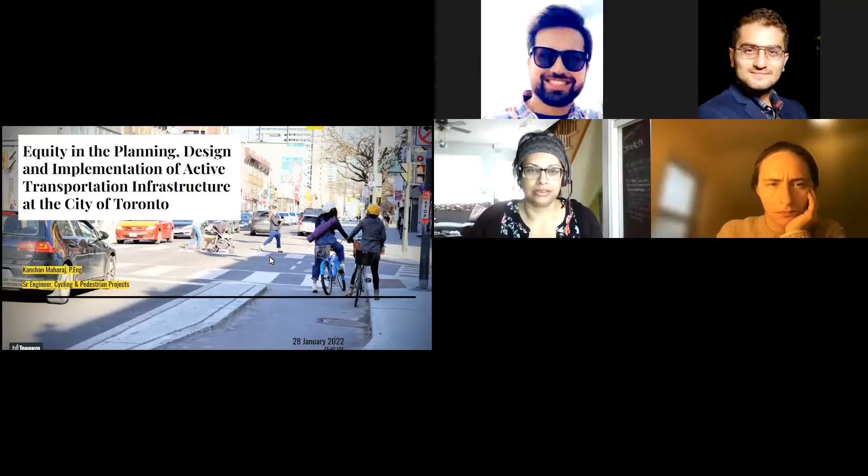Overview of the topics and the sequence. I'm going to try and summarize all of this data and all of the information. I'm going to go over our history of the cycling network plan, the first plan in 2016, and the recent update in 2021, the near-term prioritization framework that we are now using, and the cycling impact analysis and neighbourhood improvement areas that we use to help incorporate more equity data and information to inform our cycling network plan.

Improvements to the equity index map, the public consultation design process that we go through. I'm going to present a case study of a neighbourhood improvement area where we implemented a project and had to go back and make changes. And then talk briefly at the end about some of the materials and construction processes that we use.

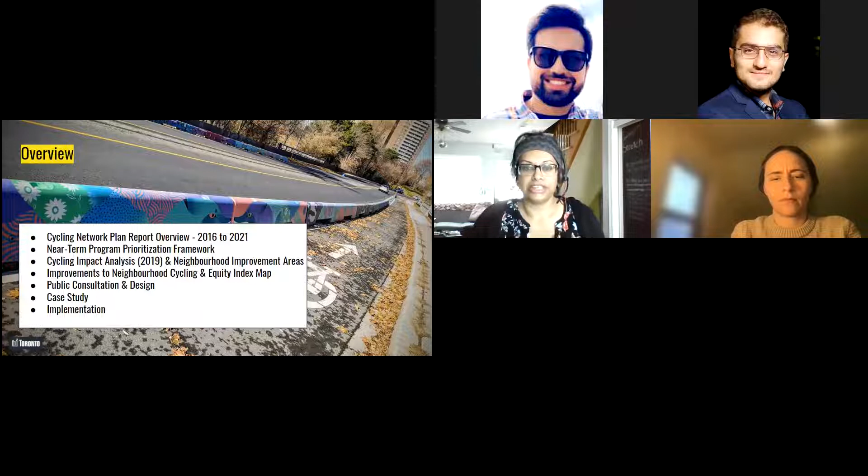So our first cycling network plan was in 2016. And it was a 10-year cycling network plan with 8 categories of analysis. Let's move this out of the way. In the orange here are all of the categories that we used in the first cycling network plan: current typical trip generation type of data, connectivity, barrier crossings, network coverage, transit access, safety, and potential cycling and current and future cycling network demand.

This network plan was based on a snapshot of a tool that the city uses called T.O.INview, which is part of our capital coordination office. And this tool is used to coordinate all of the different types of construction all around the city. At the time, most divisions participated in it. Now I think all but one major division participates in it, as well as third parties. So TTC, all the utilities also have all of their projects in there.

But at the time in 2016, when we did this first snapshot, because of how rapidly everybody's programs were changing and that there wasn't high participation, by the time we published the map and the network plan, it was already out of date because everybody's programs were changing.

In 2018, we came back and we redid it. And we realized that we need a near-term program and a longer-term program. A near-term to take advantage of the projects and opportunities that were more solid and more firmly planned and already programmed, as well as a longer-term plan and a citywide plan. And we didn't lock it into 10 years anymore. We just looked as far in the future as we had data.

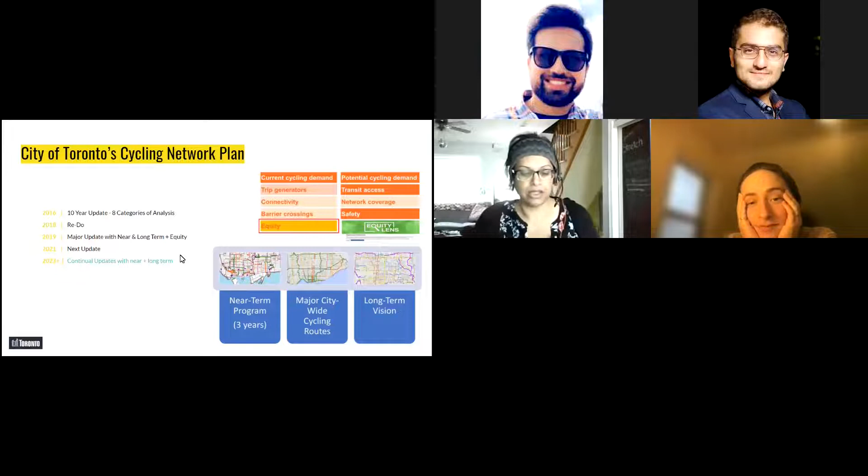The goal of the cycling network plan has always been to connect, grow, and renew our cycling infrastructure. Historically, we had always taken advantage of road reconstructions or resurfacings and bundled with those types of projects. We didn't really deliver projects on our own. And what that resulted in is a lot of disconnected and small segments of cycling infrastructure wherever the opportunity historically presented itself.

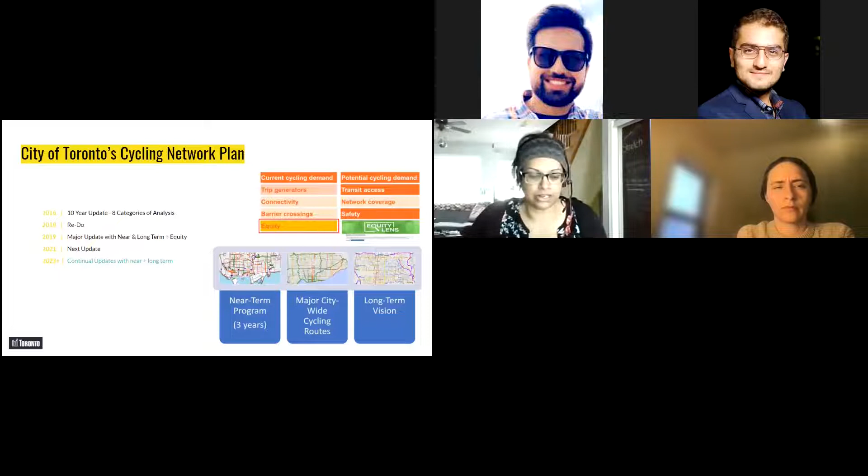So our goal now is to try and connect all of those disjointed sections, as well as to grow what we have out there and renew and upgrade the older pieces of infrastructure to bring it up to current standards. Another goal of our cycling network plan is to try and meet the city policy objective in the city's official plan to bring all Toronto residents within 1 kilometre of a designated cycling route, as well as the TransformTO long-term goal that 75% of trips under 5 kilometres are walked or cycled by 2050.

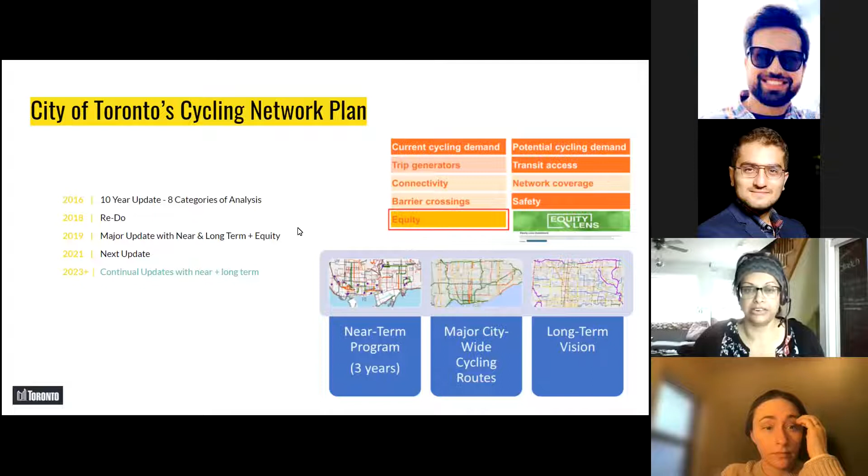So the 2019 plan, the dark orange factors here are ones that we added more data in 2019 to do a further analysis, as well as we added the equity data and criteria. This slide shows our near-term plan.

Something else that happened between 2016 and 2019 is that the Transportation Division went through a reorg. And the cycling group had their planning responsibilities removed from our group and moved to the capital programming group. So one of the advantages of that is that cycling is no longer planned independently of transportation infrastructure. It's included by default as part of the larger program.

And our group, the group that I'm in now, the Cycling Pedestrian Projects Unit, we are responsible for delivering the near-term plan after the capital programs unit plans the longer-term plan and determines what is possible near-term and what is possible in the long-term. And then they hand the near-term plan to us to do the consultation and the delivery of that near-term program. This slide just shows how that near-term program is determined.

So the candidate routes are all compiled, and I'll talk about this a little later about how that data is compiled and what data goes into it. And we look at opportunities. So state of good repair program, road safety focus, planning area focuses. We look at the trip generators and all that type of data, the collision data, barrier crossings, network coverage data.

And then how constructible and complex is this project? How likely are we to be able to do it in the near term, and what opportunities do we have to build it? So whether it's a standalone project bundled with a road reconstruction and resurfacing, or whether it can be done quick build with our own materials and our own contracts, or it needs civil construction.

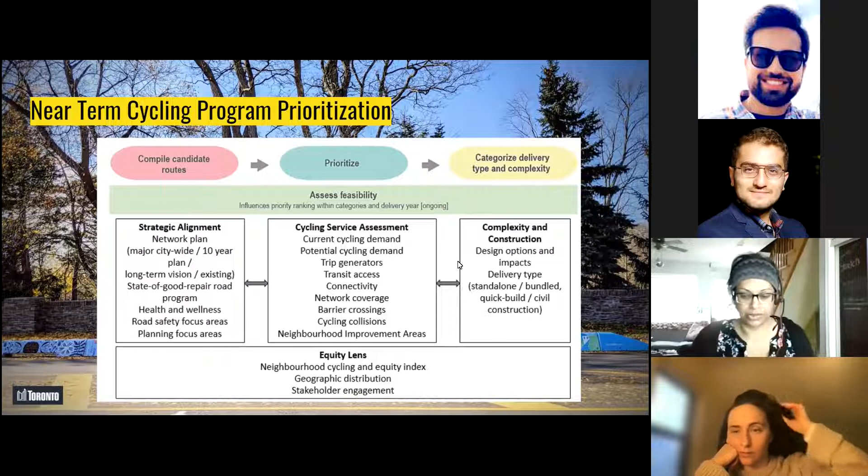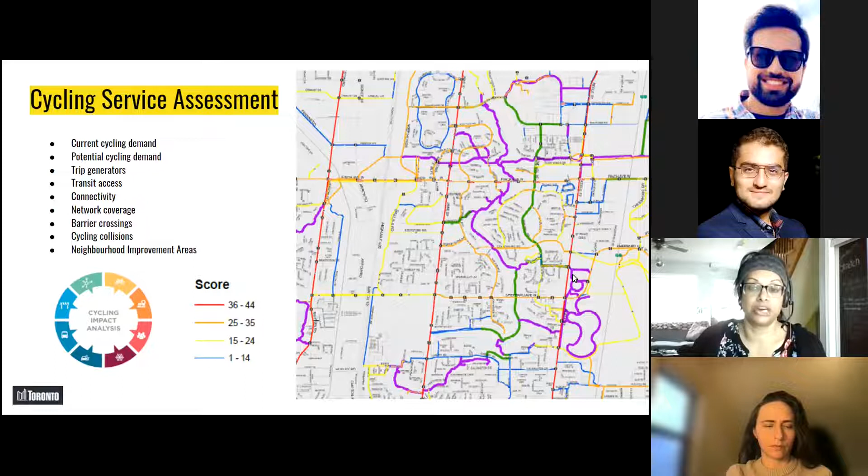So the city has designated neighborhood improvement areas. In March 2014, the City of Toronto identified 31 neighborhoods out of the 140 social planning neighborhoods that are designated as neighborhood improvement areas under the Toronto Strong Neighborhood Strategy. There are 15 planning tables that cover these 31 neighborhoods, and each NIA is assigned a community development officer who will work collaboratively with residents and city staff to make sure city services and facilities address the neighborhood priorities. It also supports partnerships with other community agencies to deliver services.

Each route that we analyze as part of our cycling network plan has an equity score, and that equity score is based on 5 key areas: the economic opportunities in the neighborhoods, income levels and quality of the job opportunities; the social development, things like education, literacy, access to social recreation and cultural services; participation in decision-making, so voting in elections and working with neighborhoods to make plans and priorities;

healthy lives, like medical care and disabilities and illnesses that the residents in that neighborhood live with; and the physical surroundings in the neighborhood. So access to transportation, parks, green spaces, public meeting spaces, and air quality.

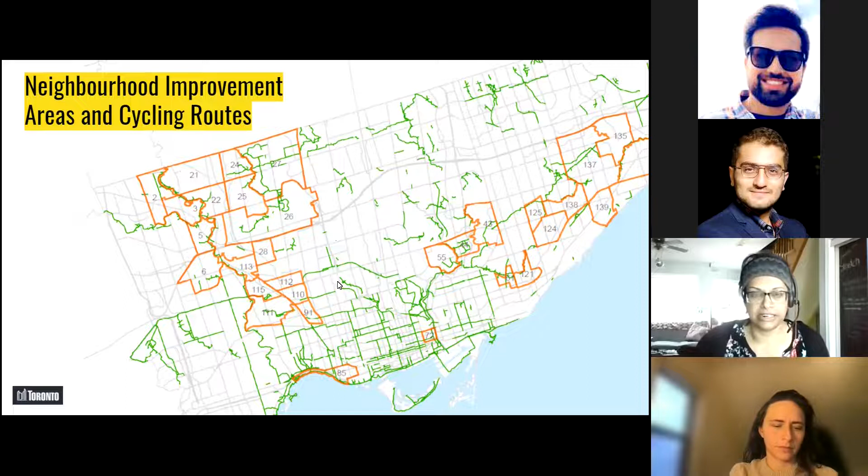When we did our 2019 update, we went to almost all of these neighborhood planning tables, of the 15 of them. And we took maps of their neighborhoods and we put them up on the walls and we asked for feedback on anything related to how people get around their neighborhood and where the important destinations are. And not just cycling. So that's a key thing to remember in this consultation that we did.

We asked for everything. How people get around. Is it walking, transit, driving? Where do they go and how do they get there? And what barriers do people experience?

Safety, lighting, accessibility, costs. Where do people want to go and where do they need to go, regardless of the mode? And all this data we collected, we still have all of this data, we still use all of this data, and it helps inform our public engagement and consultation process when projects are programmed and make it into the near-term plan for these different neighborhoods.

We used all of this data to then create a heat map to show where the important destinations were and to inform the scoring process. When we scored all of our routes, if a route passes through or serves a neighborhood improvement area, it automatically got double the points. So if a route either passes through or serves an important destination that people in a neighborhood improvement area said is important to them, we doubled the points.

And the reason for that is to hopefully try to float those routes up to the top of our scoring and prioritize them in the delivery process as well. Then we took all of this heat map data and overlaid it with our cycling network plan data, as well as the neighborhood improvement area data, just to validate and to make sure that we were actually serving these neighborhoods more effectively.

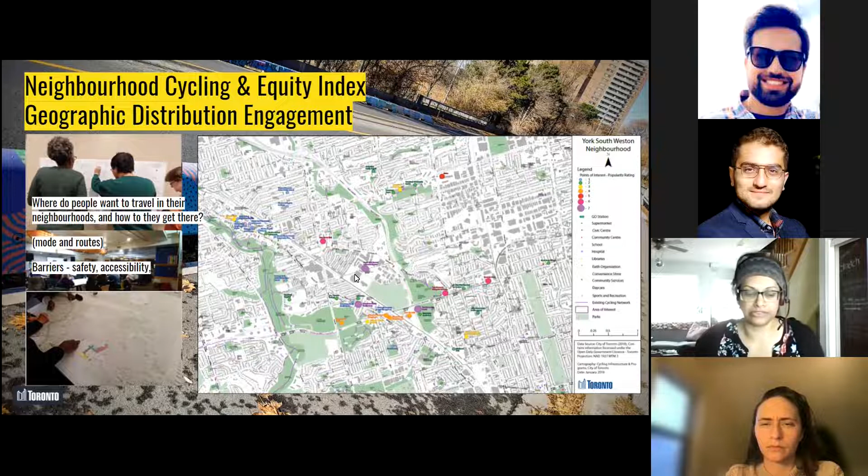And that's part of our public consultation process that we do during the year up to before the project is actually built. And most of the tools that we've been using, like the equity index and that type of data analysis, aren't specific to transportation. So there's a lot of room for improvement here, which is what our division has started to embark on most recently. And I'll talk about our budget a little bit later, on how we're applying an equity lens to our budget as well.

And transportation's overall goal is to try and prioritize designing and building integrated cycling infrastructure in neighborhoods with vulnerable populations. So people with low income, women, youth, racialized groups throughout the city of Toronto. And I'll also talk about that later when I talk about our cycling budget.

So the next slide shows our 2022 to 2024 near-term program. The different color codes show the routes that are underway, that are new, renew routes that are already out there that we're going to upgrade, and the ones that we're studying for future implementation. There's a few routes on here that were previously approved for implementation that will be programmed as soon as opportunities allow. You might hear me say state of good repair; that's also part of the renew program, to upgrade things that are out there to bring them up to current standards.

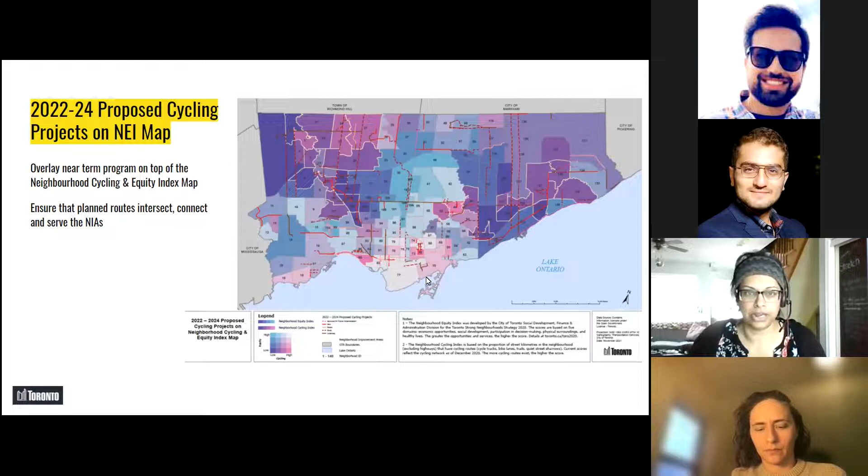As I mentioned previously, our unit in 2019 was reorganized such that the planning of cycling infrastructure is now part of this programming. It's no longer our responsibility at all to program long-term cycling. It's now part of the overall transportation programming and prioritization framework.

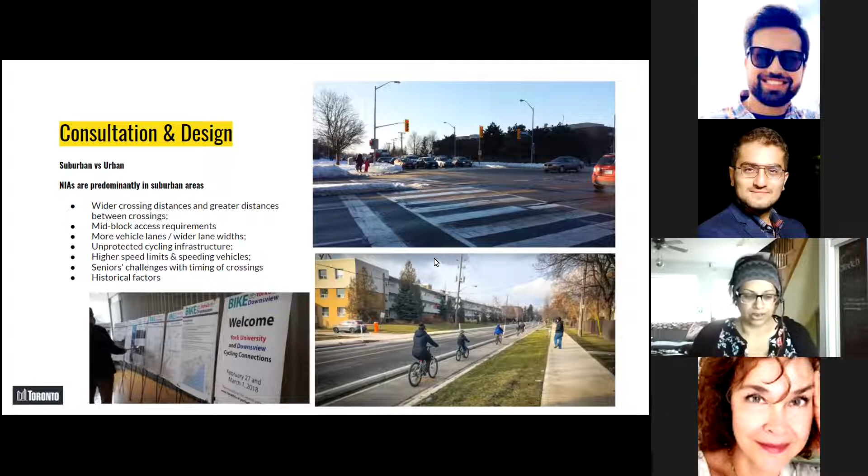This is a case study about a project that we worked on in one of the neighborhood improvement areas, Flemingdon Thorncliffe, which is in the northeast corner of Toronto in the curve of the Don Valley Parkway. We built the first project there in 2018, and we went back in 2021 to make changes. We did our consultation and outreach in 2017 to 2018, at the same time that we were doing the new 2019 cycling network plan. Then we had to go back in 2021 to make changes based on the feedback that we received.

So this is what we did for this project. It's a high density neighborhood improvement area, a lot of high-rise buildings, immigrant populations, variety of languages, ages, and abilities. It's also a TTC route with high transit use, and lots of potential cycling connections outside and within this area. We had many consultations. We did pop-ups. We partnered with neighborhood groups. I think we hired TCAT as well to do outreach in this neighborhood. And we created a lot of data.

We asked questions related to cycling safety, pedestrian safety, parking. We also do parking surveys before we make any impacts to parking, and we saw that there were a lot of off-street parking lots that were not used. So it seemed at the time that we could remove a lot of parking because there was very much underuse of off-street parking lots. They were vastly empty.

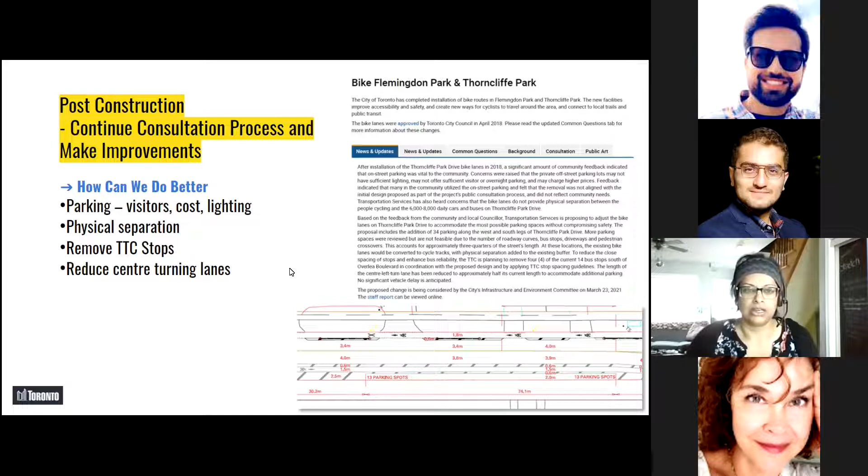The next couple slides are about our delivery process. So I'm just going to skim over this now. People can ask me more questions about this later. But something I touched on earlier was the ways that we deliver projects and how complex or not complex things can be. Usually, historically, our best opportunity to make significant impact to a street is as part of a road reconstruction, because that's when we can move curbs. We can change the physical amount of space that we have to work with when the full road is being reconstructed. That doesn't happen very often. It's at least every 20 years, often longer. There's many roads in the city that haven't been reconstructed for more than 50 years.

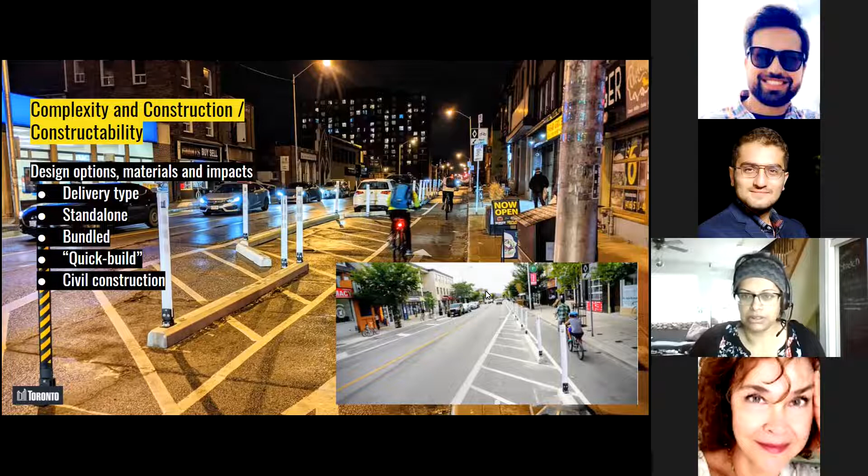And then these bollards are also spaced such that there's gaps both for drainage as well as for moving the parking bins out. I think I have a picture of the walls as well. Oh, no, there's more curbs. I'll touch on the walls. I don't know if I have put a picture of the walls in here. No.

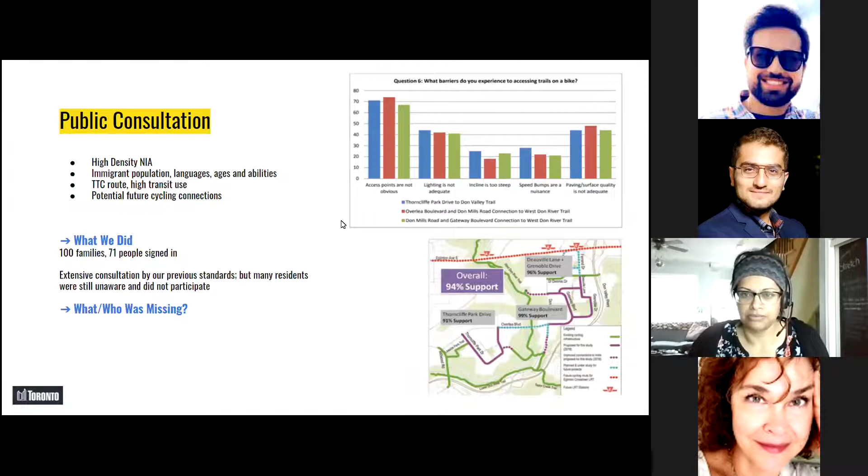So some of the materials that we use, I've talked about the paint, the concrete, the bollards. So those are for projects that we can deliver ourselves. And when we look at a project in the corridor and program it, we look at things like maintenance, sweeping, snow clearing, drainage. All of our cycle tracks are wide enough for a plow to fit down and wide enough to be swept.

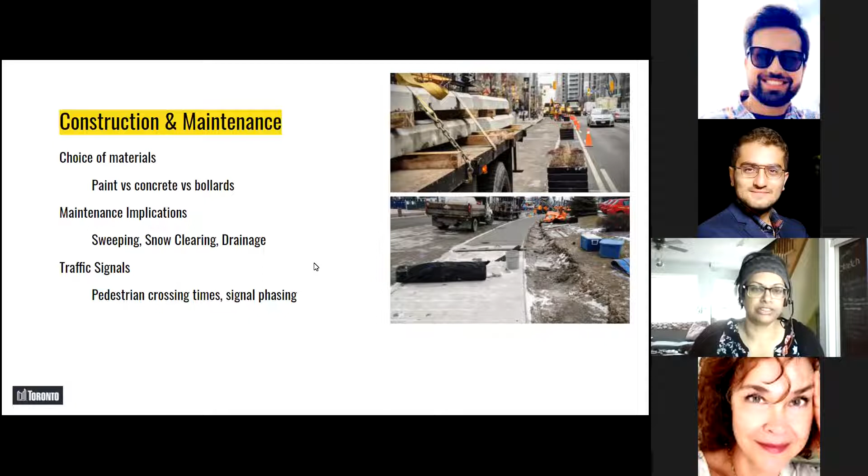And we also are responsible for coordinating traffic signal changes and bicycle signals as part of our projects and any corridors that need signal changes. We have a lot of stuff out there. This just shows some of the data that adds up to a total of 755 centerline kilometers as of January 2022. We also have thousands of pieces of concrete. All of that concrete, the curbs and the walls, were all added since 2019 when we first added them to our contracts to add more physical separation.

This is a picture of the low walls that we have, and these are also custom. They were first used on the Lakeshore Boulevard cycle track, and since then we've made changes to them by adding the drainage in between and slightly changing the dimensions. But the reason we use these is because they allow drainage. They're also very narrow. A Jersey barrier is 85 centimeters or wider. These are 45 centimeters wide, and we can put them in a lot of existing buffers.

We can also make them very long, and we can fully manage this from end to end because we have our own contracts to do that. We're not reliant on a road resurfacing or reconstruction to implement something like this.

We also have the flexible bollards. We're replacing the round ones with the flat ones now. The flat ones are much more robust because they are actually secured into the roadway with a sleeve and screwed into that sleeve, while the round ones were just kind of hammered into the road or screwed into the asphalt. And they don't last very long.

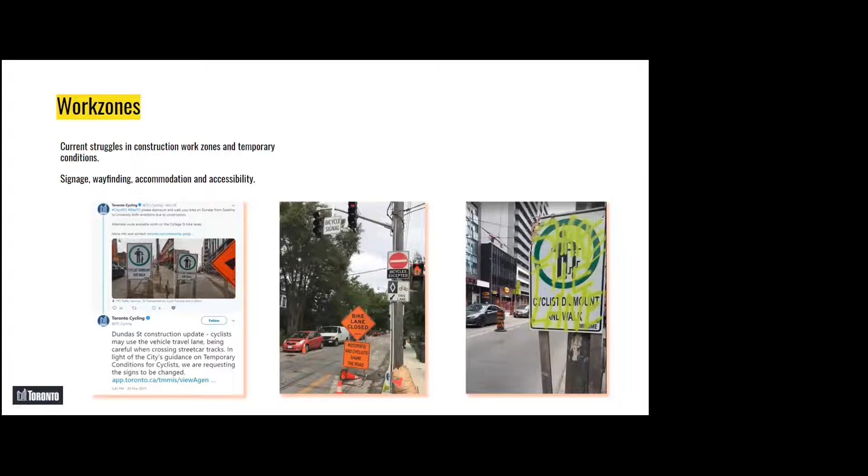One of the other challenges we've had are work zones. We've got constant struggles with work zones and trying to be consistent throughout the city in what we do and how things are managed. We have better guidelines now. These three pictures here show some historical failures. This dismount sign is something that you should never see in the City of Toronto unless the road is fully closed. We would never direct cyclists to walk or ride on the sidewalk.

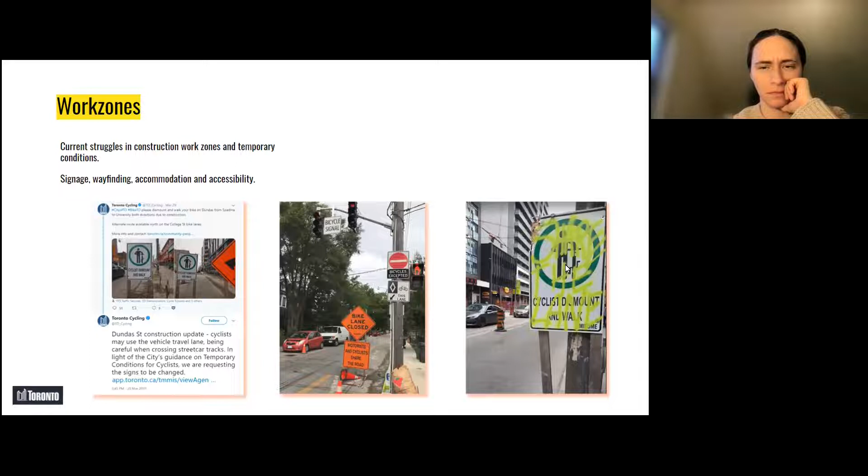And I know there's been inconsistencies even recently in how the signage is used. Sometimes when it goes up, the cyclists correct it for us. It should be a shared road sign, so somebody's painted that over. This bike lane closed: this is a contraflow bike lane, so this bike lane cannot be closed unless there's another route, because directing somebody to cross a yellow line into head-on traffic is not the right thing to do. There's only cars coming the other way. There's only bikes going in the away direction on this road.

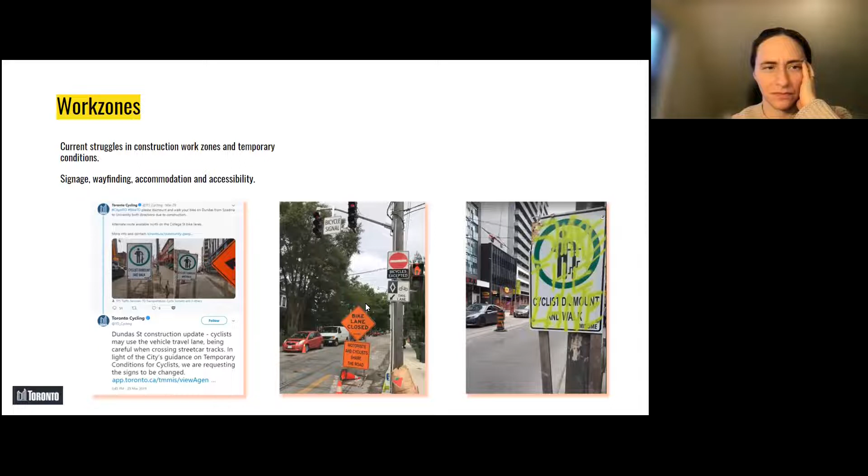And legally in the City of Toronto, a cyclist is allowed to use any lane of traffic on a non-highway road. So the only way this would be up here is if the road was completely fully closed and nobody can get through. And we're working with the film office and the work zone offices to be more consistent on how the signage is used.

All of the signage related to filming typically goes through me, or at least I'm copied on it and I can comment on it. But we have a unit in transportation that's responsible for the work zones. And our guidelines are being updated this year as well.

So cycling and snow has been in the news a lot over the last couple of weeks. I'm just going to touch on this briefly now. You can ask me more questions about it later. But yes, the volume of snow was unprecedented in recent history. There were also other factors at play, but it really should not have taken this long. And many routes and cycle tracks are only starting to be cleared now.

I'm not going to make any excuses for that. It is transportation that is responsible for that, but not our division. Over the last couple of years, we've tried to shift how cycling is viewed in the City of Toronto, that cycling infrastructure is transportation infrastructure, and that a cycling sign or pavement marking or separation is part of the roadway. It isn't special because it is for people cycling, and we should not build anything that the city cannot maintain year round.

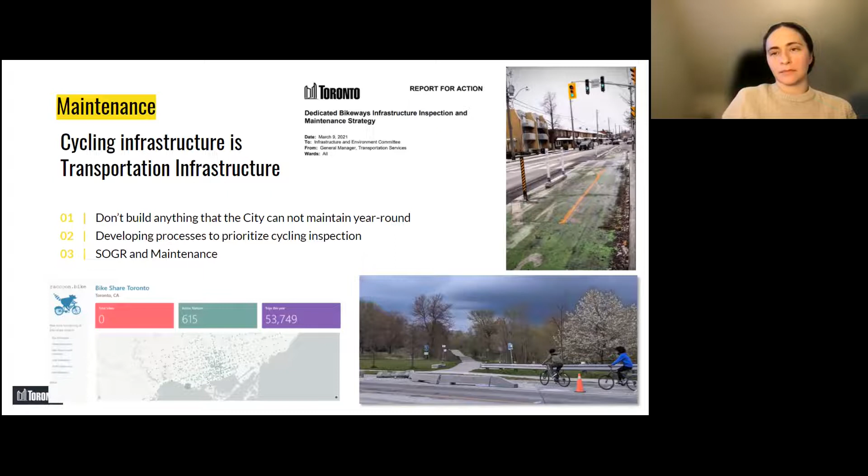And when we build things, we do consult with road ops, we consult with solid waste. You might have seen video of garbage trucks driving over the bollards on Bloor Street, saying that that's what they were supposed to do. That's not what they're supposed to do. That's not what used to happen when cars were parked there. So there's been some miscommunications, and we're trying to be more consistent and make sure that all of that information gets out and is consistently applied throughout the city.

As well as to prioritize processes for cycling inspection and infrastructure inspection. There are now more cycling patrols just for cycling, to improve our state of repair and maintenance. Because while Toronto is in the Northern Hemisphere and is in Canada, people do cycle year round. There's this bike share bot where you can see the daily bike share usage in the City of Toronto. And even with the last 2 weeks, there's still been almost 54,000. This cap was taken today. 54,000 bike share rides in the City of Toronto in January so far.

There are 8 to 9 months of the year where people can cycle comfortably. It might get cold, it might get rainy, but we don't typically get a lot of snow accumulation. And historically, our cycling volumes don't go down that much in the winter months because the roads are generally clear, except for what's happened most recently.

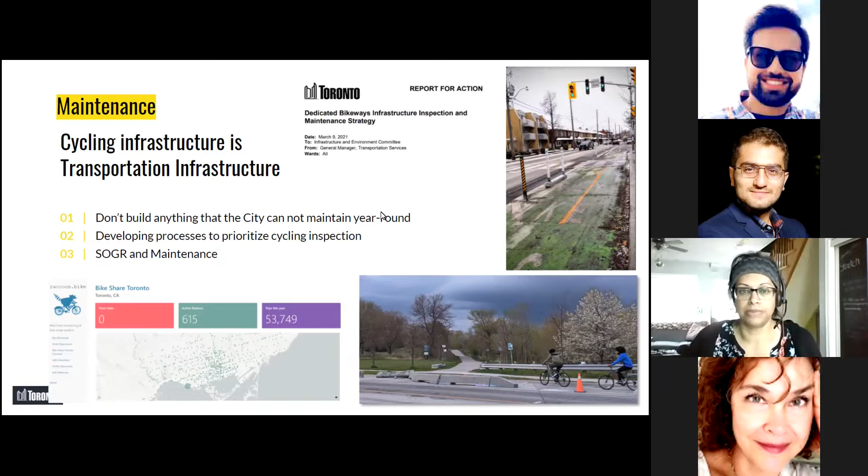So that's all I have for you today. I'm happy to take questions or elaborate on anything that I've shared. And thank you for your time.